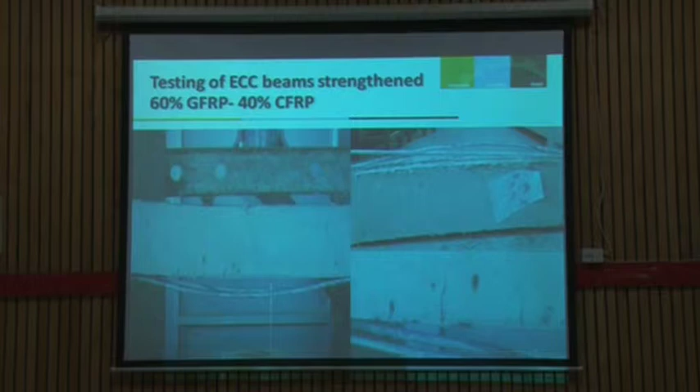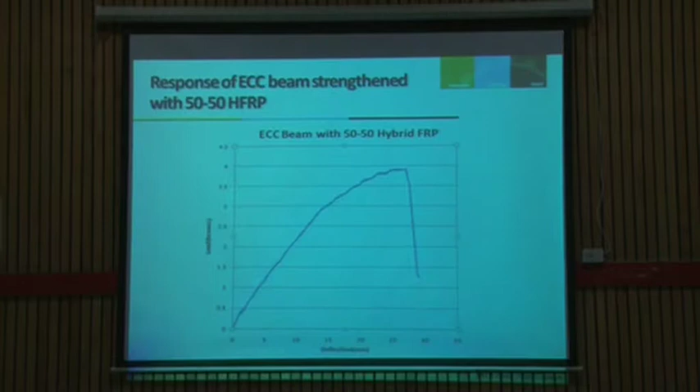FRP strips on the surface. We tested these beams with different combinations, and in most cases we found that debonding failure of the FRP system occurred.

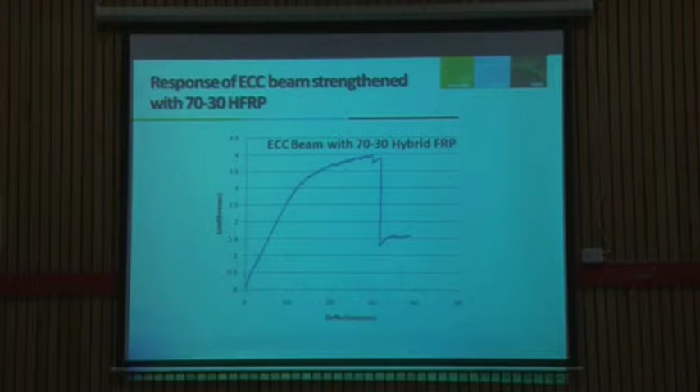This is for a 70-30% hybrid FRP system. Here we are combining the response of all, comparing with the control beams, and you see there is significant improvement in strength with just 2 bars of 8 and 10 mm diameters tested, in 70 and 30% combinations. Although this strength was observed with the debonding mode of FRP failure, meaning the full strength of the FRP rebars had not been utilized sufficiently.

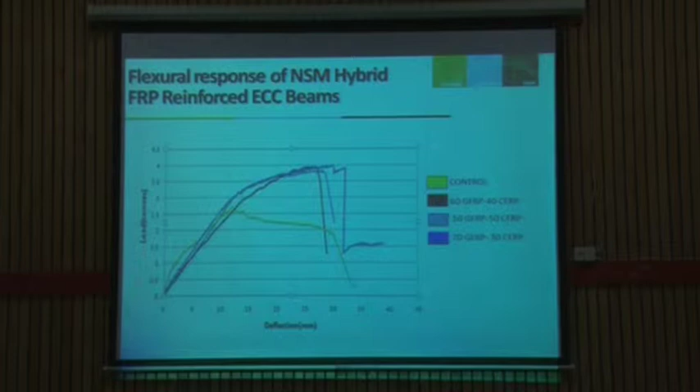So this is the debonding failure. In fact, only 2 minutes are there, but there are some other things I've shown, that this application has also shown application of ductile fiber reinforced concretes.

In addition to the FRP system, so far in the NSM class we have shown the application of ECC material as a substitute for FRP, for frames and beams, and found that very good improvement in strength and ductility has been achieved for this combination.

This is the advantage of the ECC material. In normal FRC concrete, it just goes for peak and then the strain softening branch starts. But in the case of typical ECC material, we have a strain hardening branch starting between the first cracking and peak, and then strain softening branch starts from the peak. This strain hardening branch is not there in typical FRC system.

That's the advantage of ECC material, which can be applied for external strengthening, because you are not looking at the whole structure, but using ECC as a precast element which can be layered at plastic hinge locations, and then we can get sufficient strength as well as ductility.

So the typical FRP material plus ductile ECC can also show very good improvement in strength and stiffness. Typical under-reinforced and over-reinforced beams were taken with different loading combinations. Here we have taken ECC at a particular plastic hinge location, and then as layers, and we see the response is found to be very good.

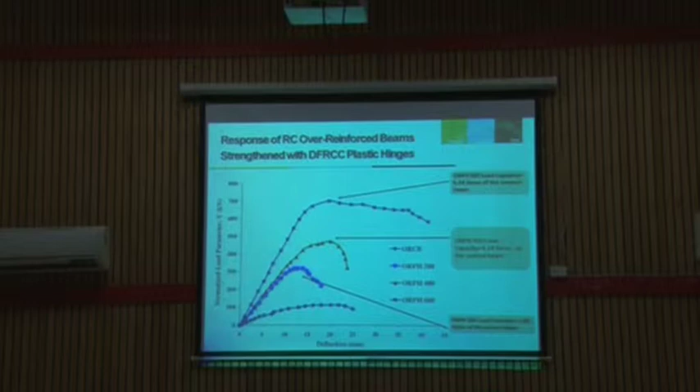We are picking normalized strength parameters and deflections. For the over-reinforced beam with plastic hinge length of 600 mm, we find significant strength improvement, and we also saw significant ductility available in the system.

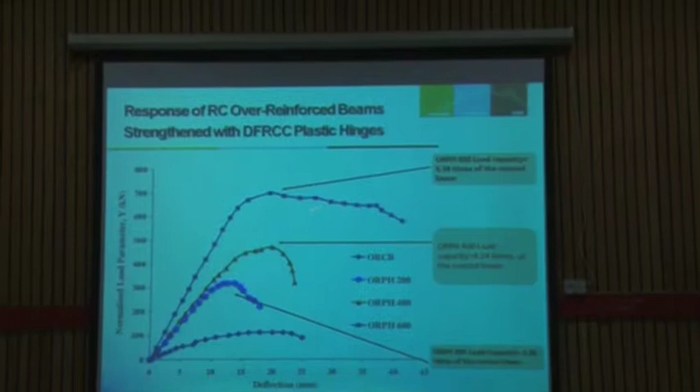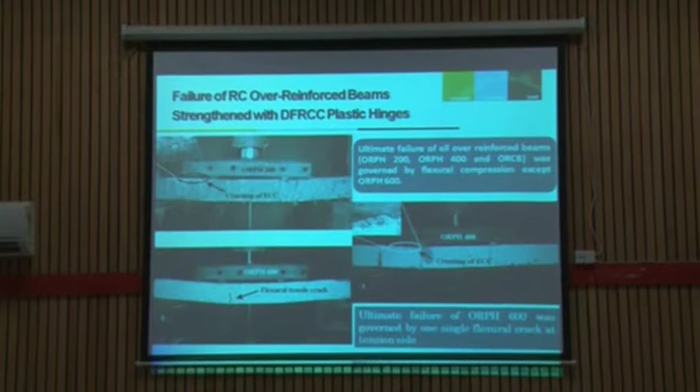Similar observation was made for ductility failure, although with a 600 mm plastic hinge length giving very good strength, there is a localized crack developed at the time of failure. In other cases, multiple cracking has appeared.

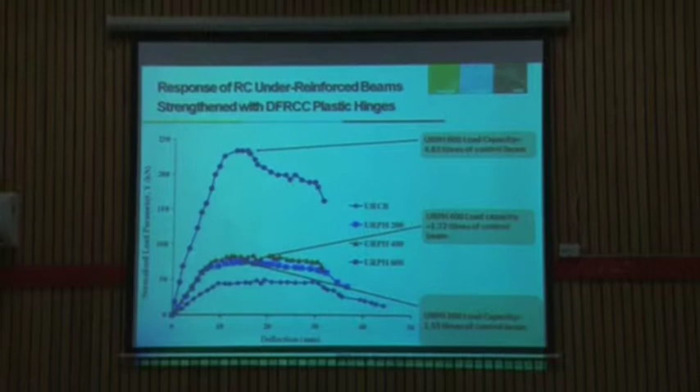Similarly, for under-reinforced beams, a much better response is achieved with an under-reinforced plastic hinge of length 600 mm. For other plastic hinge lengths we are not getting significant improvement, but for the 600 mm length of plastic hinge placed at mid-span, we are getting very significant strength.

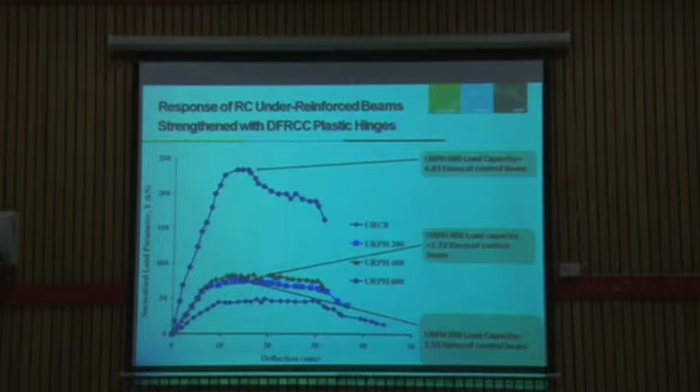There are some modes of failure. Similarly, going for the layers concept with external layers, we are using strips of ECC placed in external layers, and there also we are getting significant improvement.

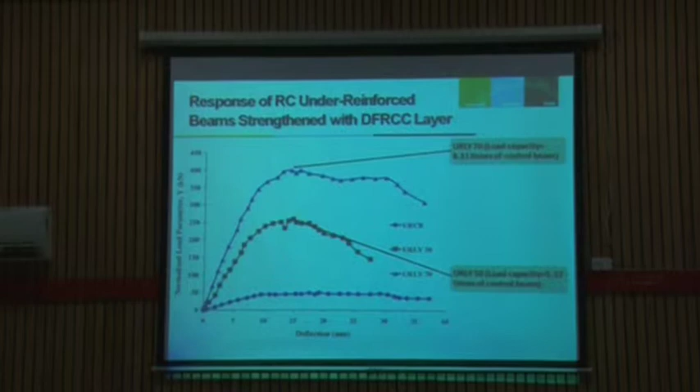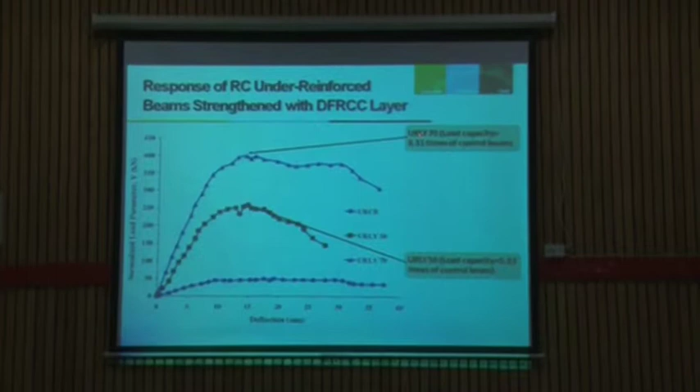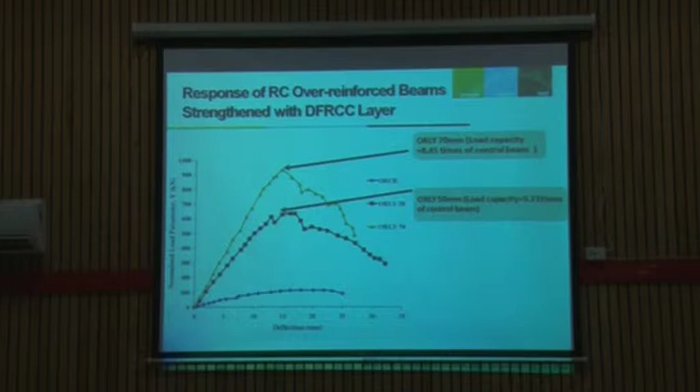This is similarly for over-reinforced span beams. We are not getting the same improvement advantage as in the under-reinforced beam, but there is still ductility improved in the system, even for the over-reinforced beam.

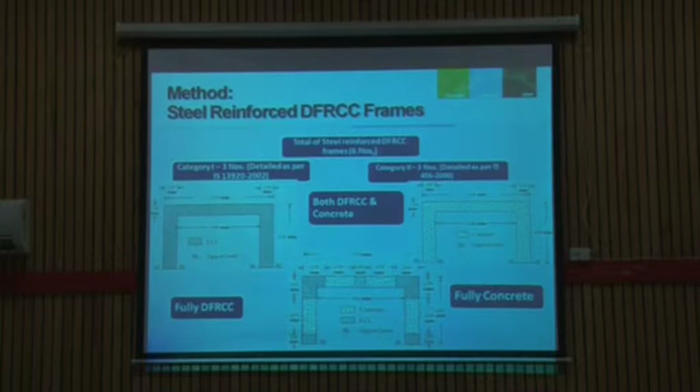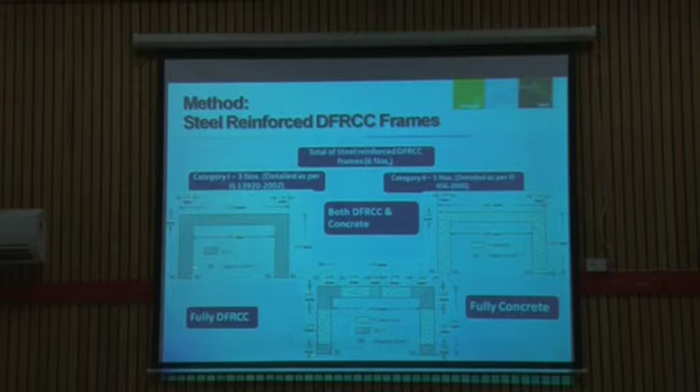Now coming here, there is a frame. This is typical beam column connection, a typical frame structure we have taken to demonstrate the effectiveness of ECC, not for the full length. We compared three kinds of frame structures: one made completely of DFRCC, one pure concrete, and one where we are just putting ECC at a specific location, near the plastic hinge zones.

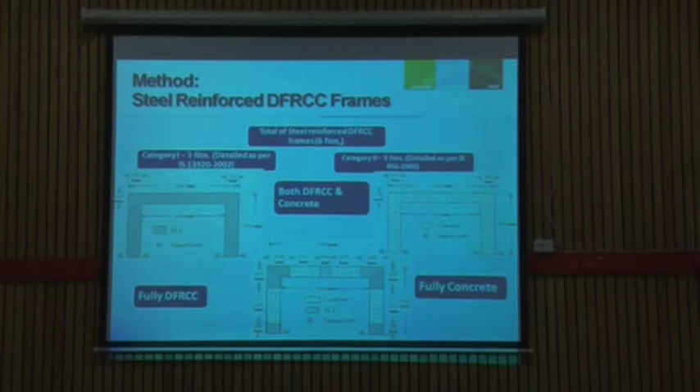Then we designed two kinds of ductile detailing: one per IS 13920, and one category 2 frame designed as per IS 456. We are showing that even in the frame structure designed as per IS 456 detailing, the response of ECC is found to be very good.

So this is detailing as per IS 13920, and this is detailing as per IS 456. We are loading the spans of these structures, and this is the response for structures designed for IS 13920.

The middle one is the response of frame structures with ECC at specific locations. In the second case, detailing has been done as per IS 456 only, and this is for the fully ECC beam frame.

This is the control concrete beam frame, and this is where we are using ECC at specific locations only. We find a very good response and correlation has been obtained and maintained there.

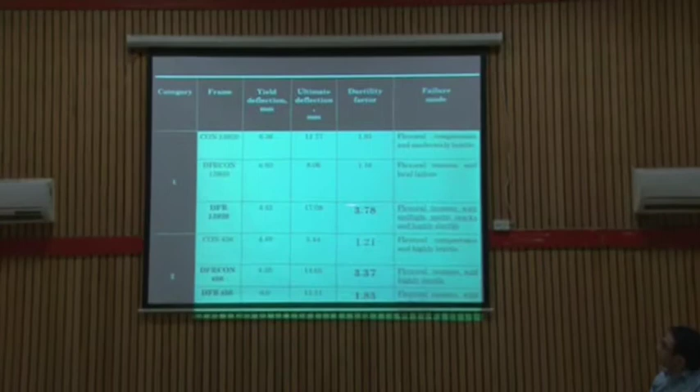These are different types of frame structures, category 1 and category 2. For category 1, the ductility factor is 3.78. In case of category 2 frame, designed only as per IS 456, the ductility factor is 3.37. This frame is designed for IS 13920, so there is not much difference there.

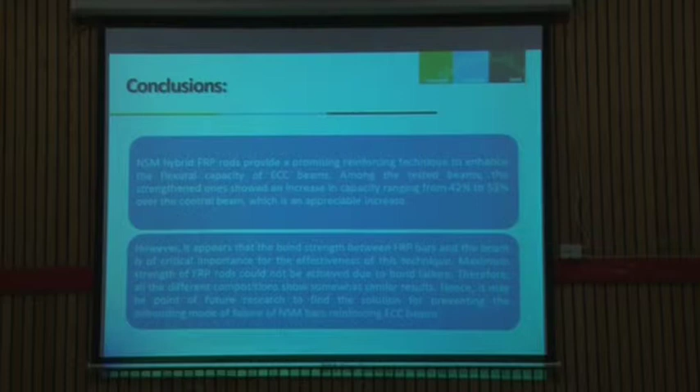With limited time, I want to show the conclusions. We have proved that we developed an FRP system - a normal FRP system and a pseudo-ductile FRP system. We utilized that FRP system as a strengthening technique, especially the NSM part, and tested it on RC beams, normal RC structures, frame structures, and ECC beams, and found that these near surface mounted bar FRP systems are very effective.

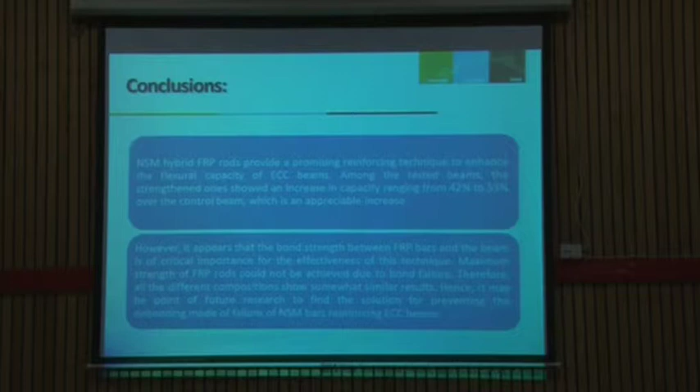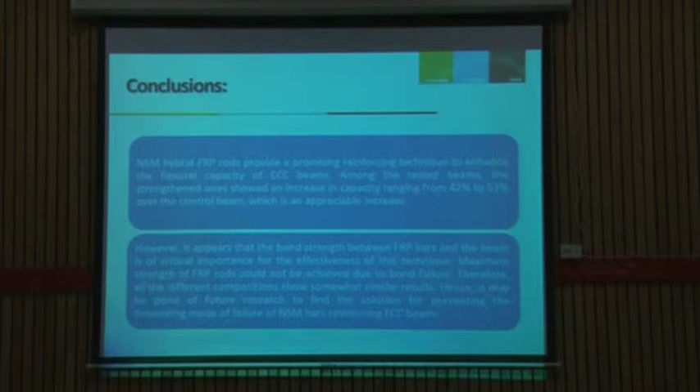Especially for external strengthening of systems, till today's research we can say it is found to be very efficient and can be utilized. There is still a lot of research to go, because one of the main modes of failure is debonding. If that could be reduced through further research on developing some mechanism, the effectiveness could be further improved.

This is still ongoing research, and future research direction. We have already got a DST project in this direction to use this material and technology for masonry structures, concrete as well as clay burnt brick masonry structures, and our team is working on that.

Although we have modified this equation, developed it, and published it, I personally feel we need a detailed investigation on this aspect. That's why I'm highlighting that, and definitely for FRP reinforced ECC beam structures, this concept or expression for balance ratio or actual reinforcement ratio for defining under-reinforced or over-reinforced sections needs to be modified.

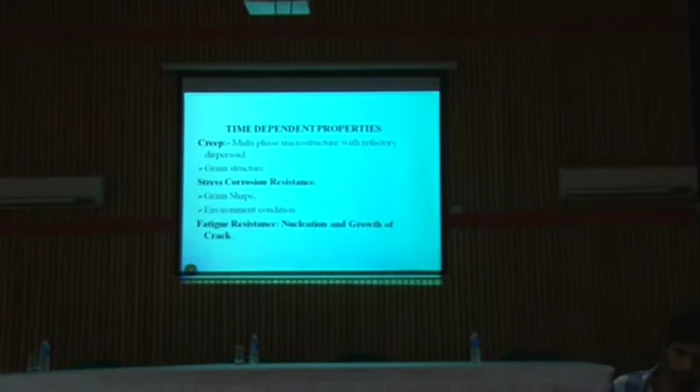As I've already told you about creep, normally if I talk about creep I will not explain the science behind it, but whenever we talk about creep resistance for any material, you will always have a matrix and refractory dispersoids. There are reasons why creep properties will always be higher if you have refractory dispersoids in any matrix, for that matter in any material, be it ceramic, polymer, or metal. Then the grain structure and the final constituents of the material also provide certain advantages.

In stress corrosion resistance, specifically in steel, or corrosion resistance, these are dependent on the grain shape of the material and the environmental condition. That I will be coming to later, and I'll explain why.

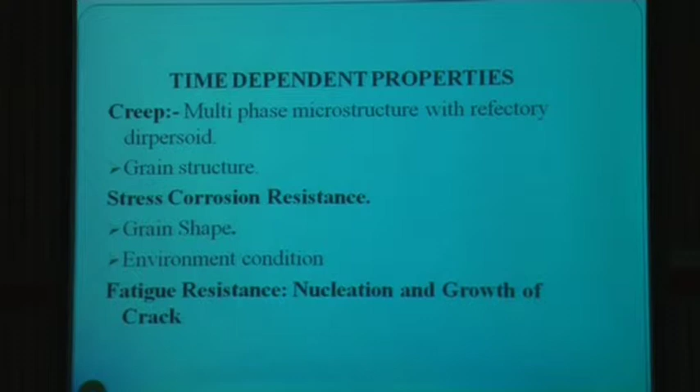And then fatigue - whenever we talk about fatigue, there is initiation and growth of fatigue cracks. That is much more important for all kinds of structural applications, which we have dismally neglected till the recent past.

Now, the fail-safe design. Whenever we talk about the fail-safe design concept, one very important point we have to keep in mind is that in today's scenario we are a little bit pragmatic. We all know that we deal with cracked bodies - no body in this universe exists which does not contain any cracks.

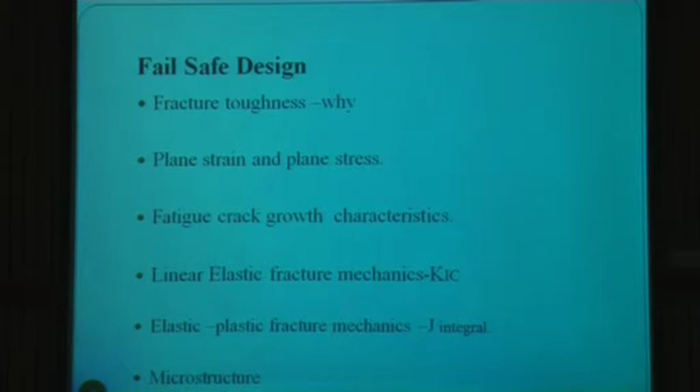So cracked bodies are what we are working with, and given that, it is much more important - we don't bother about how many cracks are there, we simply bother about the size of the crack, what load is applied, what is the stipulated life, and whether these cracks are capable of withstanding those conditions without growing to fatality.

That is precisely what this fracture toughness property of any material gives. Depending upon the condition of the stress situation, it can be a plane strain fracture toughness, where the strain in the third dimension is infinitely very small. So naturally, for a thick section and then for a thinner section, the plane stress fracture toughness is of importance.

So naturally, we don't talk about these days - materials people don't like that people talk about the yield stress, tensile stress. The design should be based on the fracture toughness of any material, because that ultimately gives you the fail-safe design. So therefore, that is important.

But by default, the fracture toughness is again determined by the fatigue crack growth characteristics. Even if you talk about any particular structural component, even if everything seems so innocent, you will find that there will be temperature fluctuations, many fluctuations in ambient situation, and you will find that this is a fatigue situation.

And this fatigue situation, the way we used to understand it - even the material scientists - there has been a sea change in that. Now, because of the structural engineering part, we today talk about ultra high cycle fatigue and very complicated cycles. And even if the material contains a very short crack, the crack growth characteristics of an ultra small crack is something different from what we used to know some 10 years back.